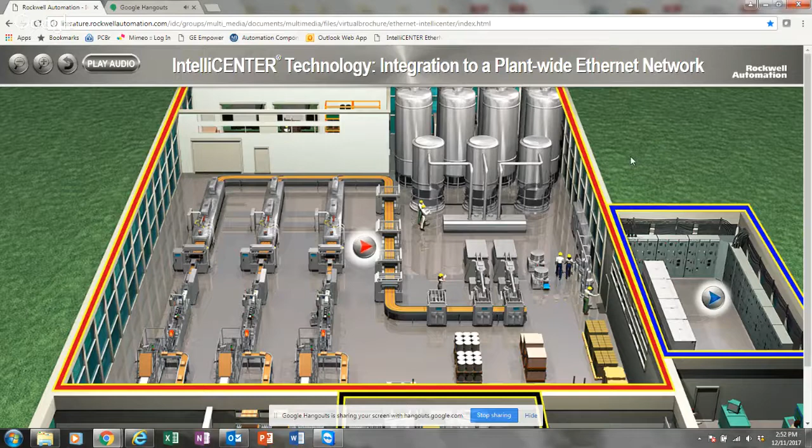Today we have Andy Powers from our power team here to talk a little bit about networked motor control centers and the Rockwell Intellicenter solution. Take it away. Thanks, Mark.

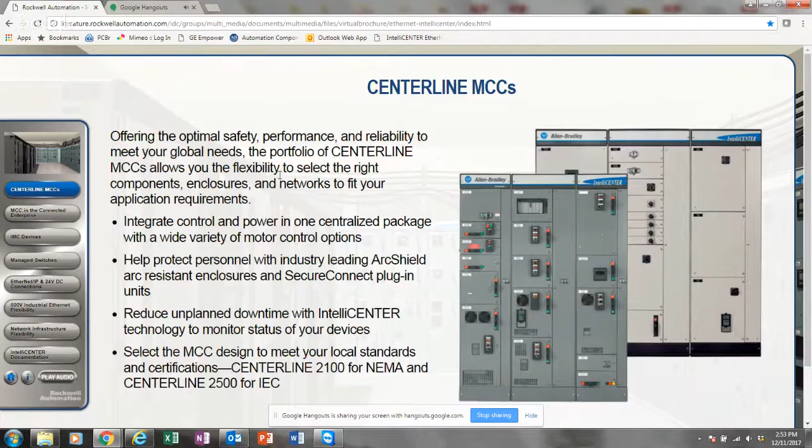As Mark mentioned, my name is Andy Powers. I'm the motor control center specialist for Northeast Electrical Distributors. And if you take a look at your screen here, I figured we'd take just a moment to review what a motor control center is. Basically, it's a structure with busing that allows you to combine motor controllers, PLCs, feeder breakers, all in a very reliable and flexible format, and allows you to make changes after the fact. But that's the basic idea behind an MCC.

Rockwell Automation took that one step further by introducing the Intellicenter MCC, networking all of the individual devices within the MCC. We've got variable frequency drives, soft starts, across the line motor starters, all connected through Ethernet cables through a managed switch in the MCC to allow for upstream control and oversight via SCADA.

Again, I just mentioned variable frequency drives, solid state overloads for across the line motor starters. With Rockwell, most of these devices already have EtherNet/IP embedded right on the device, so we don't require any additional COM modules or black boxes to facilitate this communication.

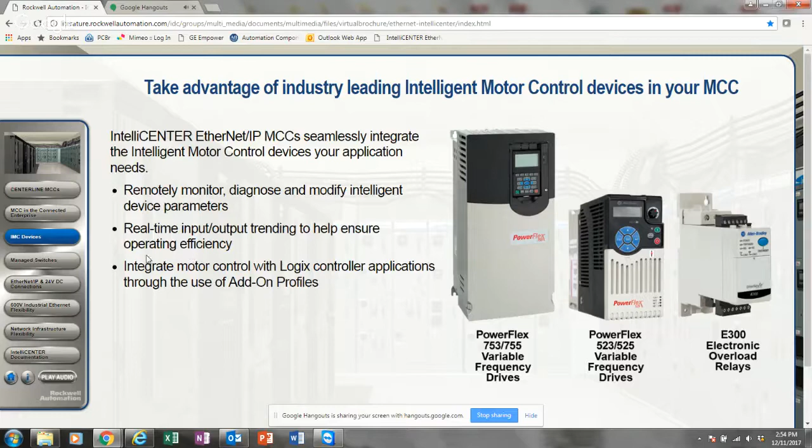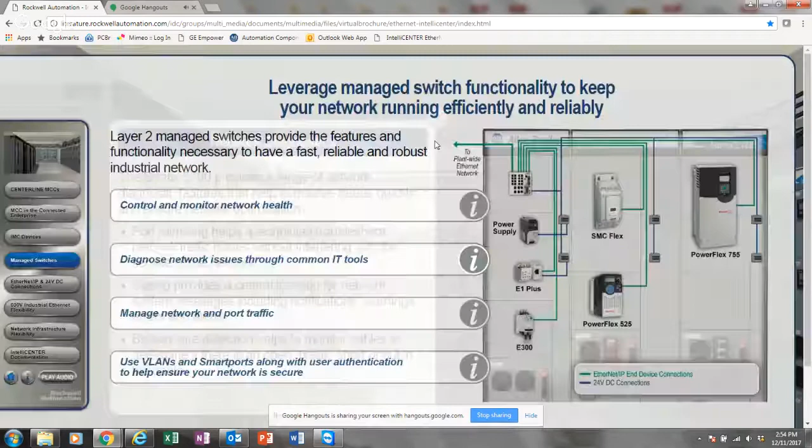Rockwell uses managed switches, which are very robust and very safe in terms of protecting your network. There are a lot of nice features built into these switches to make sure that the network is safe. We've got DHCP persistence and some other features that really help to make the network secure.

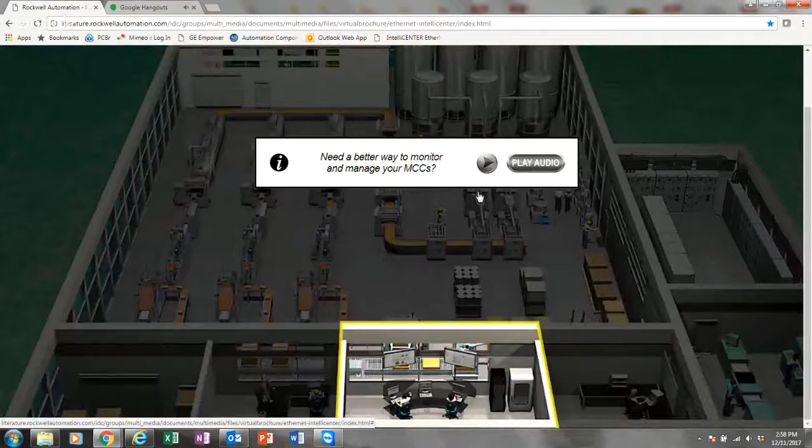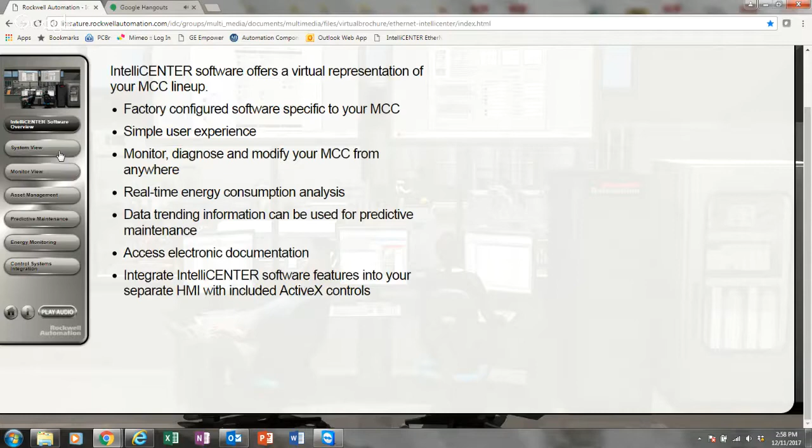Now, the thing that really sets Rockwell apart from some of our competitors isn't so much the hardware, although we have a unique hardware solution for the Intellicenter. But the biggest part of this is the software and the integration portion of this. Rockwell has configured canned software for motor control for the Intellicenter MCCs that can be run on a Logix platform. In the absence of this, you would literally have to hire an integrator to come up with a custom SCADA screen to visualize everything that's going on with that MCC.

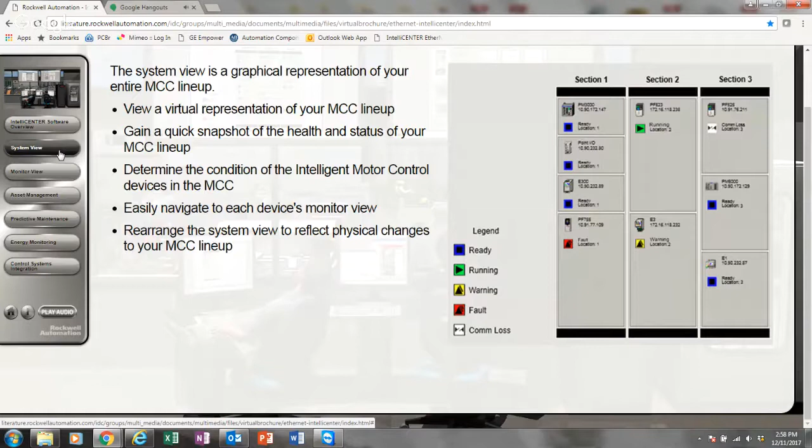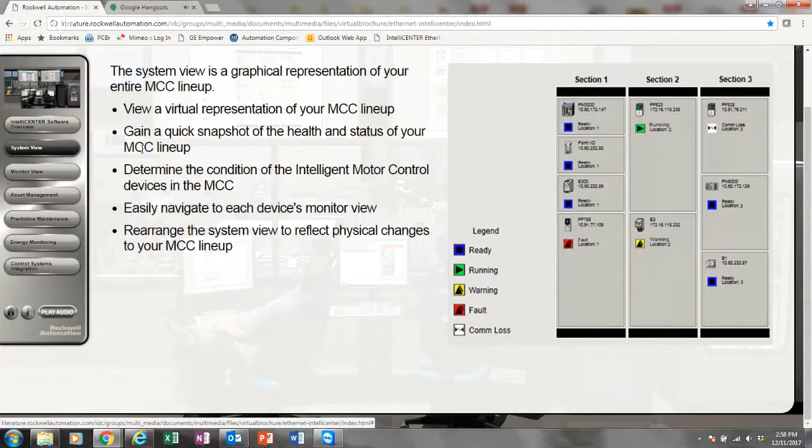With Rockwell, basically included with the cost of the Intellicenter, you have a visualization of the MCC. You've got the entire lineup there, a quick snapshot to show what's running, what isn't, if anything's tripped, if there's a problem. Then you can go to the monitor view, basically looking at any individual unit in the MCC to give a detailed breakdown of what's going on. Power, voltage, trip status, jammed, whatever you need to know about that device, you get it right there.

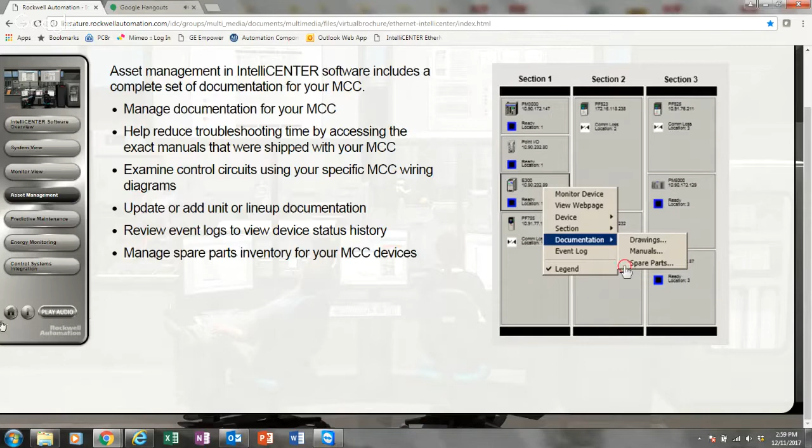From an asset management perspective, all the documentation you could possibly need for that MCC, whether it be VFD user manuals or the MCC itself, switch management, anything in programming, it's all contained within the software.

One of the nicest things about the Intellicenter is that not only can you see what's going on right now, but it does a nice job of letting you see problems that are trending, moving towards the future. You can see if you've got a particular motor that's running hotter and consuming more power than it normally would. It allows you to sort of predict problems before you have a complete failure, because failures are no fun, right?

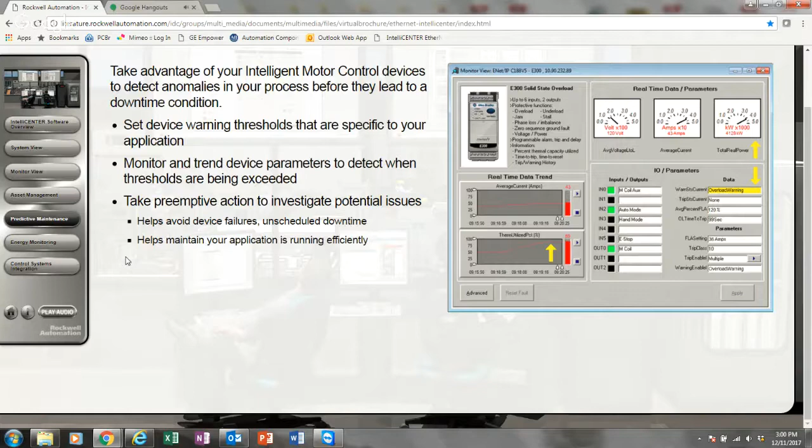Also, with the energy monitoring feature, you can use the Intellicenter software to see where your peak demand and your peak energy consumption is, when and where it's occurring, and compare that to your utility energy bill, and try to work around your usage of certain devices to prevent demand spikes and the corresponding bumps in your electric bill that come with demand spikes at improper times.

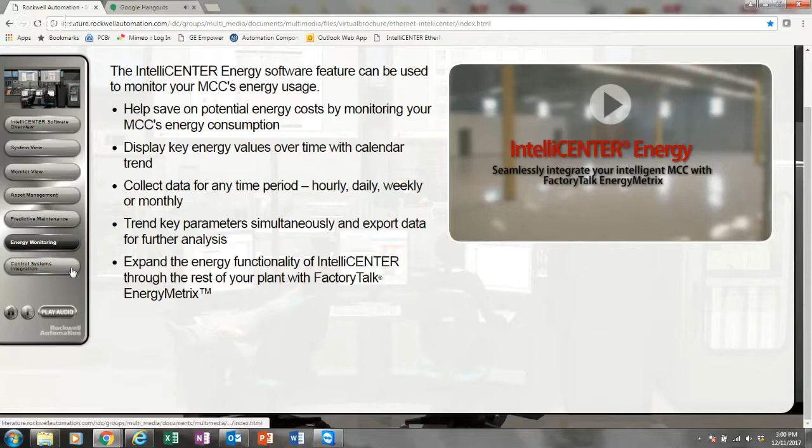The Intellicenter software also integrates very nicely into Rockwell Studio 5000 software, where basically all the work is done for you. You can import all the data from the Intellicenter, so from the data CDs with the Motor Control Center through the Intellicenter software, and all of that will populate right into RS Logix. All of your I/O points already tagged, all of the IP addresses already assigned. The user can request specific IP addresses ahead of time, or the factory can assign them for you. We generally prefer that the user select them ahead of time.

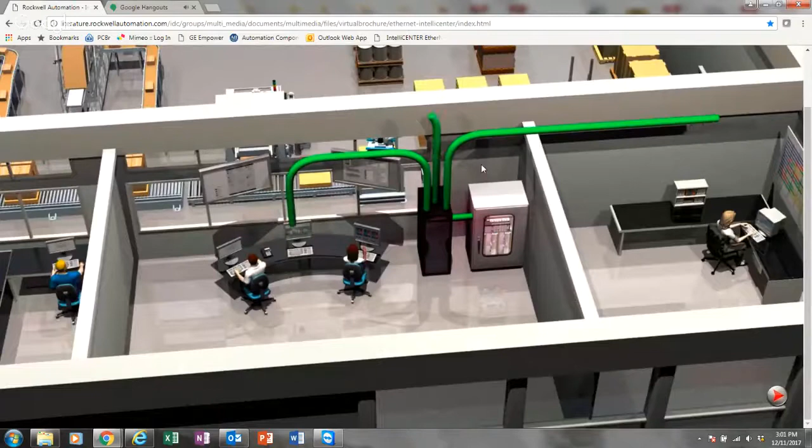Lastly, we'll take a look at your screen. We get a nice little graphic here. This kind of gives a nice visualization of how tying in your motor control centers, networking them in, ties it into the entire plant SCADA and control system, so you can monitor motors, motor controllers, feeders, all kinds of different devices throughout your plant. And that information is available over the internet from a secure IP address. You could get that information from anywhere. You could be in your living room at home and check the status of a motor starter in an MCC on the other side of the planet.

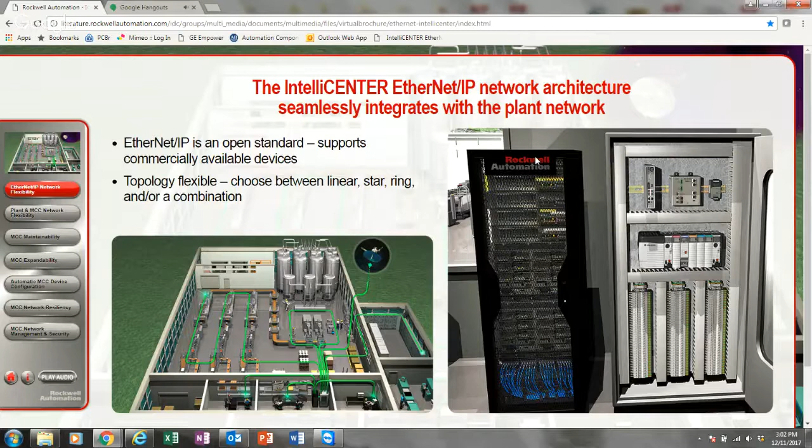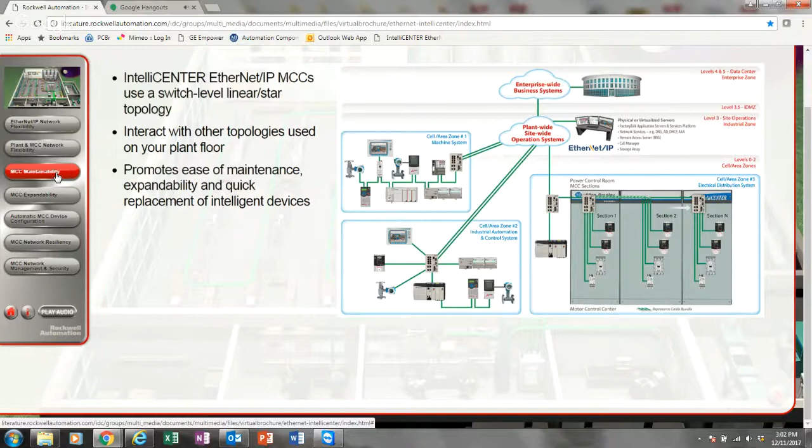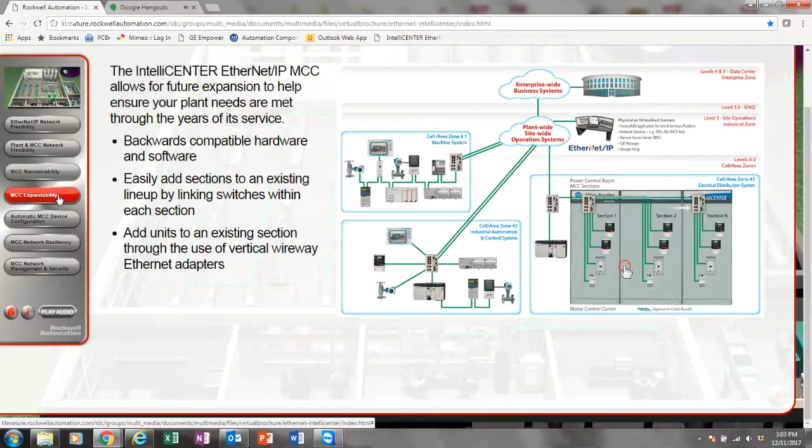Let's see here. Long story short, I don't want to get too much into the topology, but they use a switch level linear star topology, which basically uses a lot of home runs as opposed to daisy chaining, which makes for a more robust infrastructure with fewer problems. Again, in terms of expandability, using this topology makes it easier to add on to. You can add vertical sections onto the MCC and additional devices; usually we have some spare ports that we provide with the new Intellicenter anyway. But even if not, it's easy enough to add on additional sections, additional ports, additional switches. It's scalable pretty much forever.

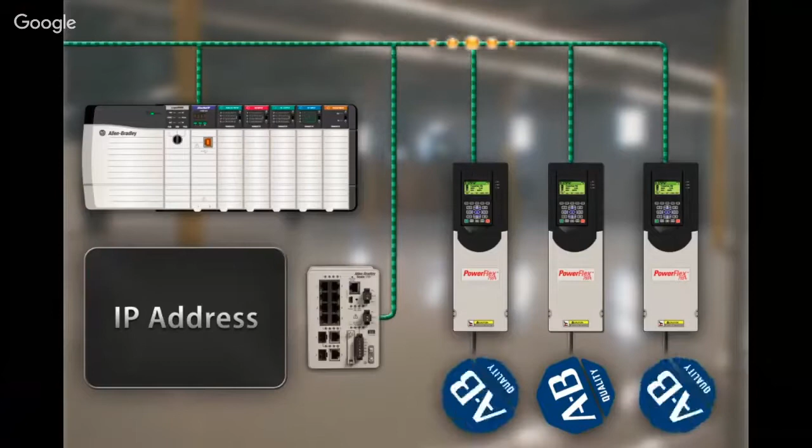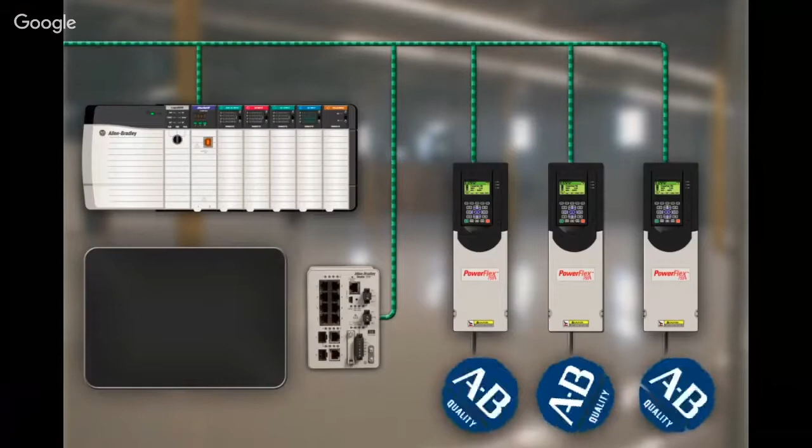This is a neat feature. It's not necessarily unique to IntelliCENTERs, but it plays very nicely into IntelliCENTERs, which is the automatic device configuration. I will play this scenario here because this is kind of neat. Basically, we have 3 drives which have been configured, started up, and are running. One of the drives fails. You can drop in a brand new piece of hardware that has not been configured, a spare drive right off the shelf. Right away, the switch identifies the drive and assigns it the IP address that the old drive used to have. Once it is assigned an IP address, the PLC controller upstream downloads the configuration of the drive that was there previously.

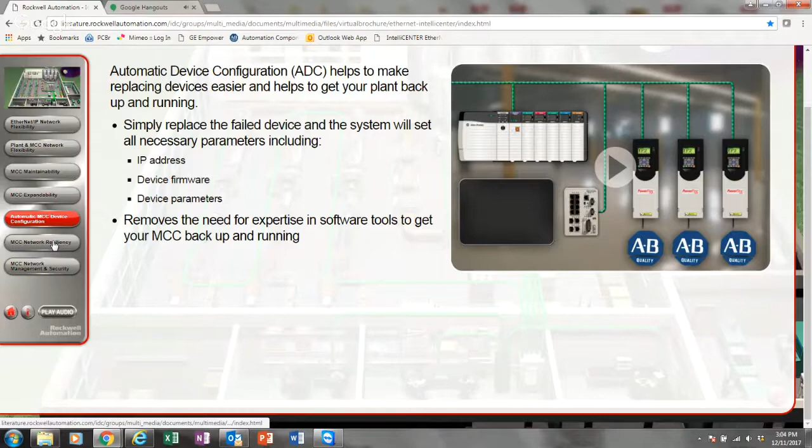So all of the acceleration, deceleration, and any configuration that was part of that drive's initial startup is backed up onto the replacement drive. That's just a really nice feature, and it does integrate well into IntelliCENTER because it allows you to do that with a bank of devices very fluidly.